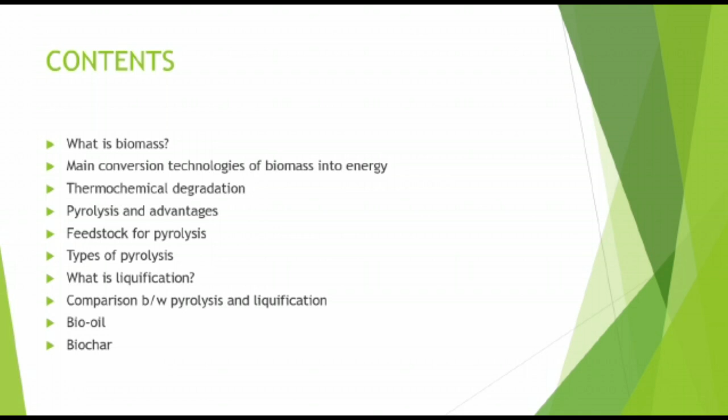Today we will discuss the topic thermochemical degradation of biomass. We will cover the following contents. What is biomass? Main conversion technologies of biomass into energy, thermochemical degradation, pyrolysis and its advantages, types of pyrolysis, liquefaction, bio-oil and biochar.

Biomass. Biomass is the plant or animal material used for energy production or in various industrial processes as raw material for a range of products. It can be purposely grown energy crops, wood or forest residues, waste from food crops, horticulture, food processing, animal farming, or human waste from sewage plants.

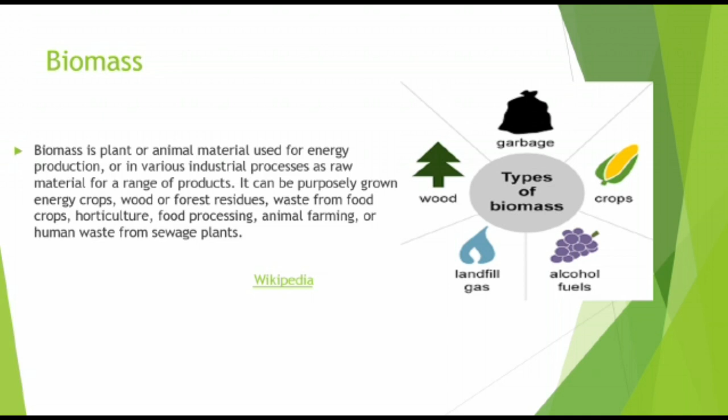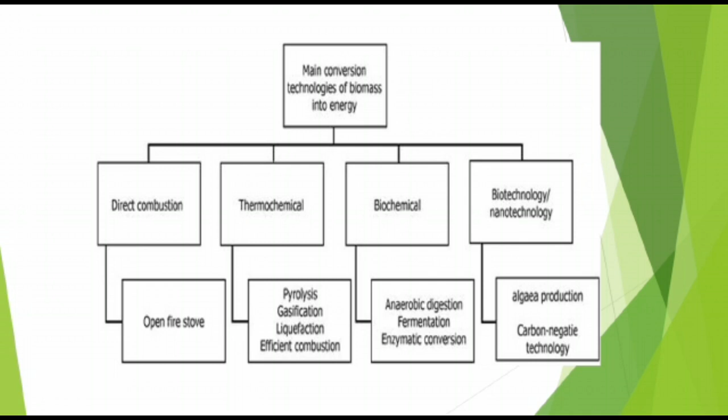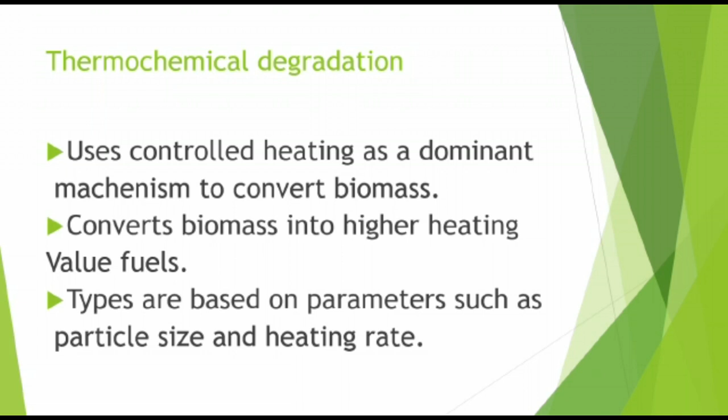Main conversion technologies of biomass into energy: direct combustion, thermochemical conversion, biochemical conversion, biotechnology or nanotechnology. Thermochemical degradation. It uses controlled heating as a dominant mechanism to convert biomass. It converts biomass into higher heating fuel. Types are based on parameters such as particle size and heating rate. Types of thermochemical conversion: combustion, gasification, liquefaction, and pyrolysis.

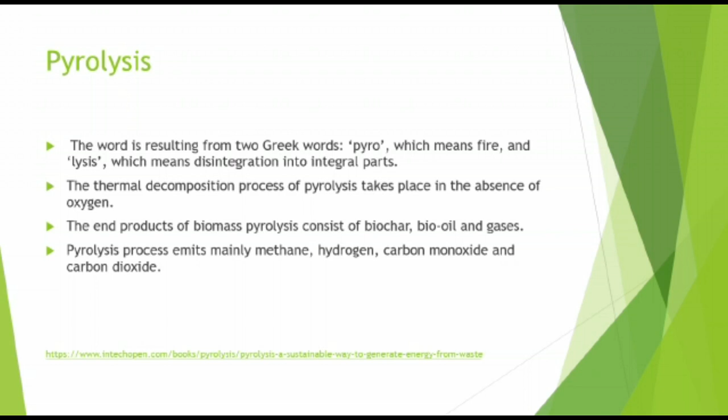Pyrolysis, the word resulting from two Greek words: pyro, which means fire, and lysis, which means disintegration into integral parts. The thermal decomposition process of pyrolysis takes place in the absence of oxygen. The end products of biomass pyrolysis consist of biochar, bio-oil and gases. The pyrolysis process emits mainly methane, hydrogen, carbon monoxide and carbon dioxide. Moisture content of the feedstock should be around 10%. Particle size of the feedstock: mostly small particles are processed, around 2 mm.

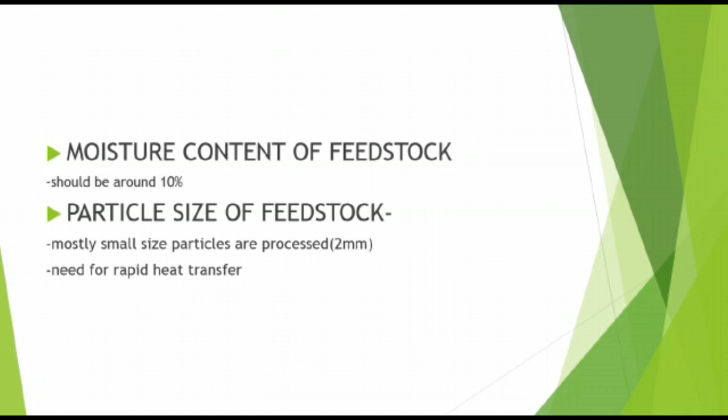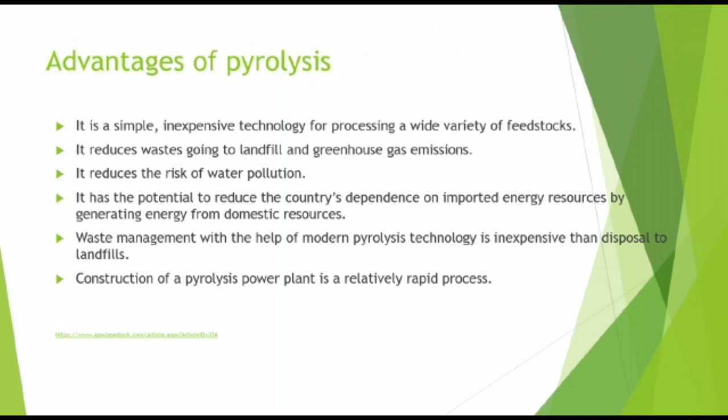Advantages of pyrolysis: it is a simple, inexpensive technology for processing a wide variety of feedstock. It reduces the waste going to landfill and greenhouse emissions. It reduces the risk of water pollution. It has the potential to reduce the country's dependence on imported energy resources by generating energy from domestic resources. Waste management with the help of modern pyrolysis technology is less expensive than disposal to landfills. Construction of a pyrolysis power plant is a relatively rapid process.

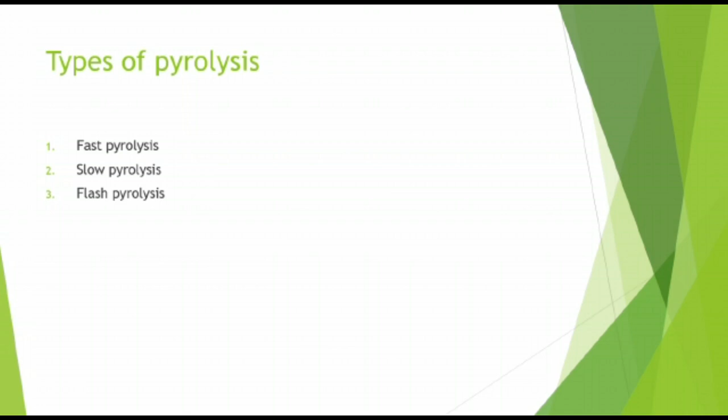Types of pyrolysis: fast pyrolysis, slow pyrolysis, flash pyrolysis. Fast pyrolysis: organic matter is rapidly heated to 450 to 600 degrees Celsius in the absence of air. Under these conditions, organic vapors, pyrolysis gases and charcoal are produced. The vapors are condensed to bio-oil. 60 to 75% weight of the feedstock is converted into oil.

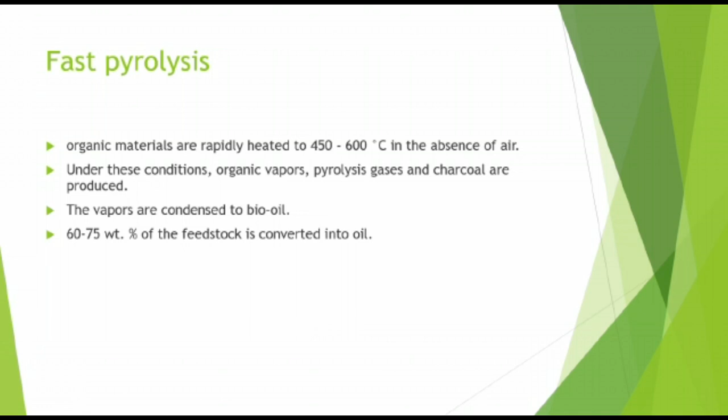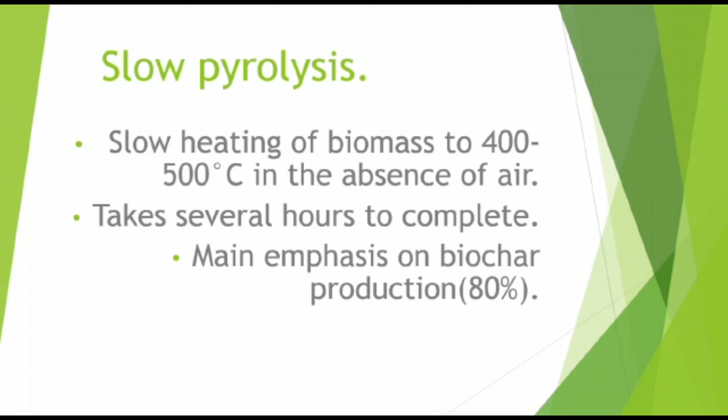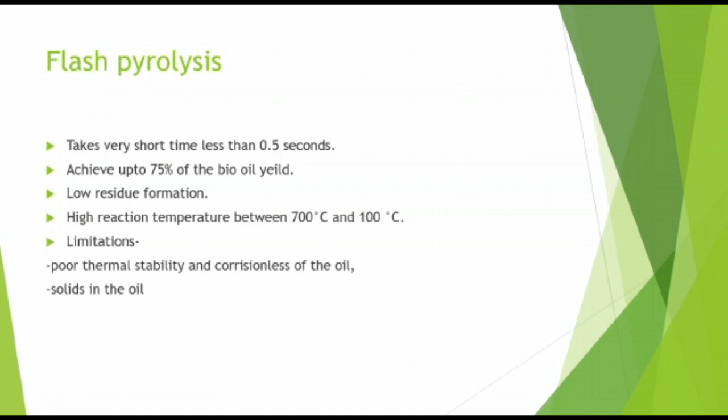Slow pyrolysis: slow heating of the biomass to 400 to 500 degrees Celsius in the absence of air. It takes several hours to complete. Main emphasis is laid on biochar production. Flash pyrolysis: it takes a very short time, less than 0.5 seconds, achieves up to 75% bio-oil yield, low residue formation, high reaction temperature between 700 and 1000 degrees Celsius. Its limitations are poor thermal stability and corrosiveness of the oil.

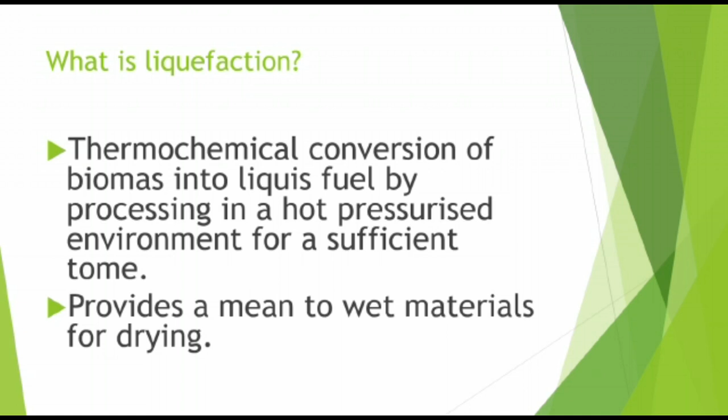What is liquefaction? Thermochemical conversion of biomass into liquid fuel by processing in a hot pressurized environment for sufficient time. It provides a means to process wet materials without drying. Liquefaction takes place at low temperature, between 250 and 350 degrees Celsius, and high pressure, 100 to 200 bar, with better quality and higher yield compared to pyrolysis. The product has higher chemical stability, higher heating value, low oxygen content, and high hydrogen to carbon ratio.

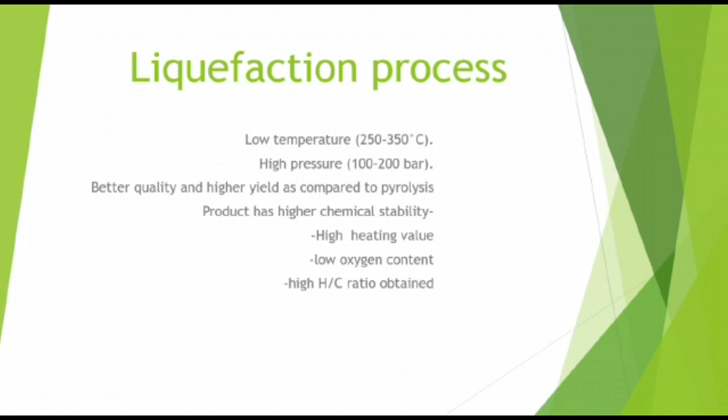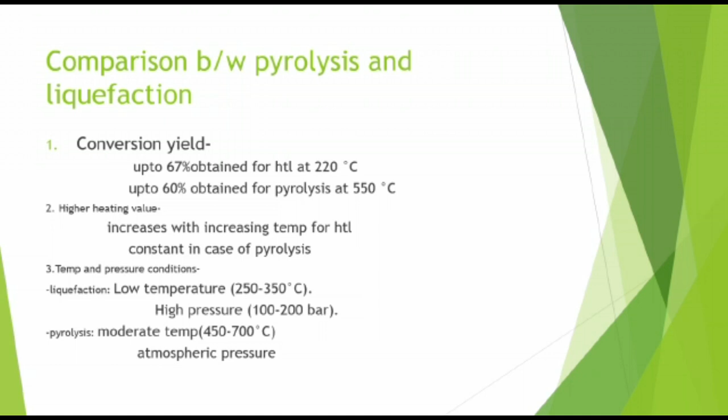Comparison between pyrolysis and liquefaction. Conversion yield: up to 67% obtained for HTL, meaning liquefaction, at 220 degrees Celsius. Up to 60% obtained for pyrolysis at 550 degrees Celsius. Higher heating value increases with increasing temperature for HTL, constant in the case of pyrolysis. Temperature and pressure conditions: liquefaction requires low temperature between 250 and 350 degrees Celsius and high pressure between 100 and 200 bar. Pyrolysis takes place at moderate temperature of 450 to 700 degrees Celsius and at atmospheric pressure.

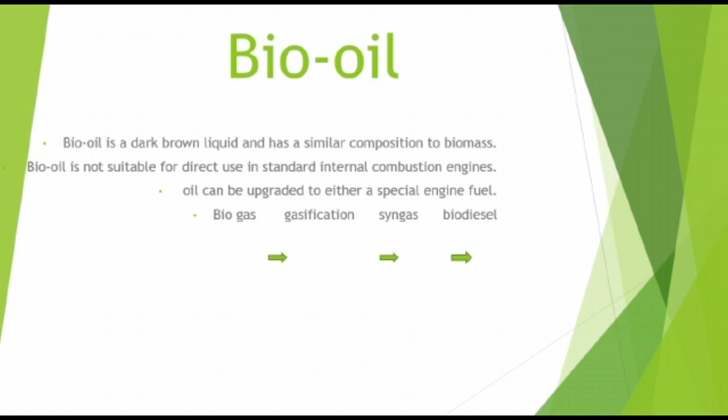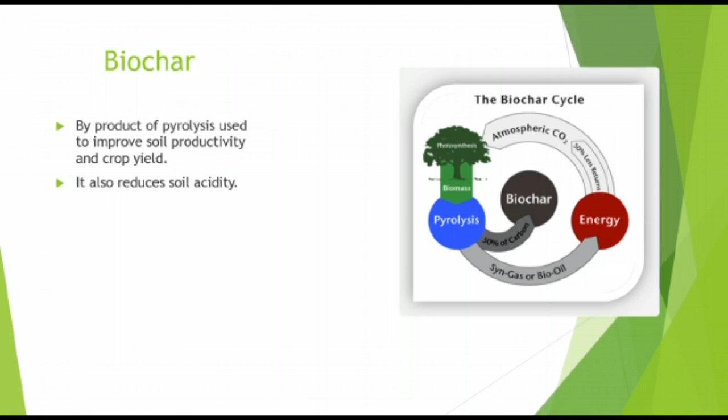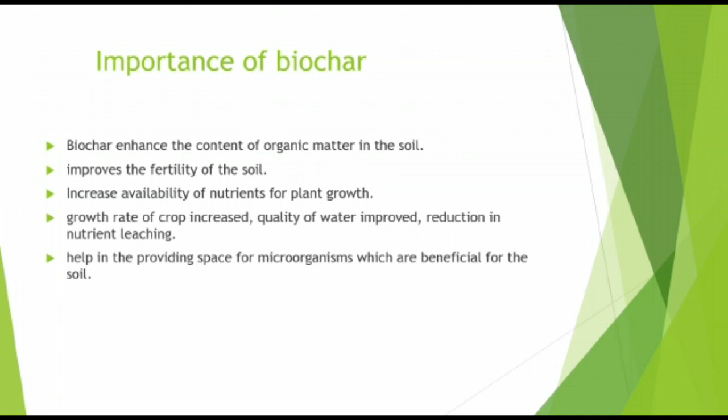For plants, the growth rate of crops increased, quality of water improved, reduction in nutrient leaching. It helps in providing space for microorganisms which are beneficial for the soil. Thank you.